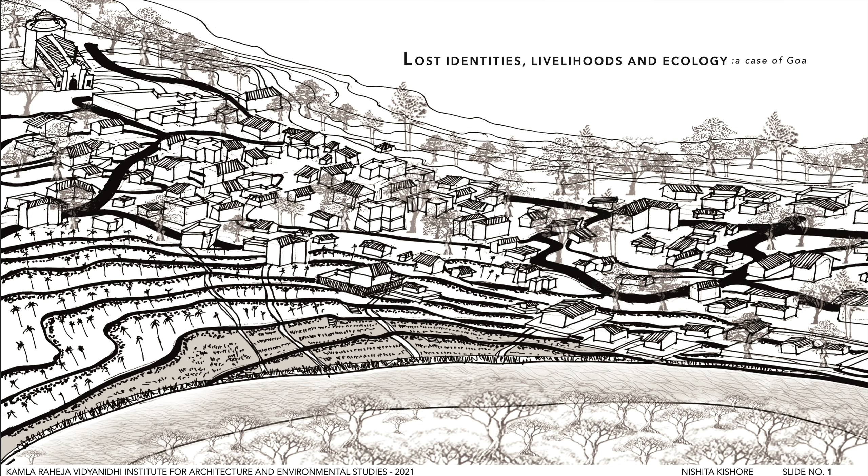Good morning. I am Nishita Kishore, and the topic of my thesis is Lost Identities, Livelihoods, and Ecology, a case of Goa. The thesis deals with the idea of alteration of landscapes happening from the beginning of civilization through various practices which results in the transformation of landscape to settlements, eroding the natural built fabric, heritage, ecology, and therefore causing the disconnect between the settlements and the landscape.

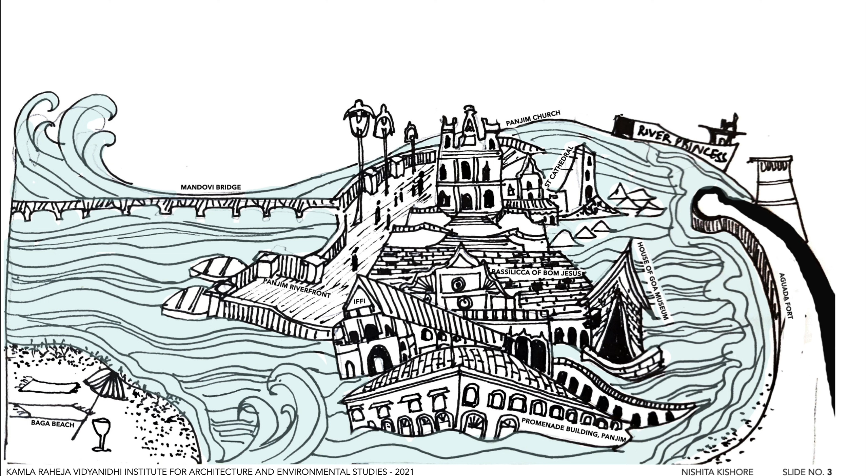This thesis also intends to focus on the communities in Goa who are resisting destructive real estate projects and how do the Goans perceive this and what are their imaginations for an alternative future.

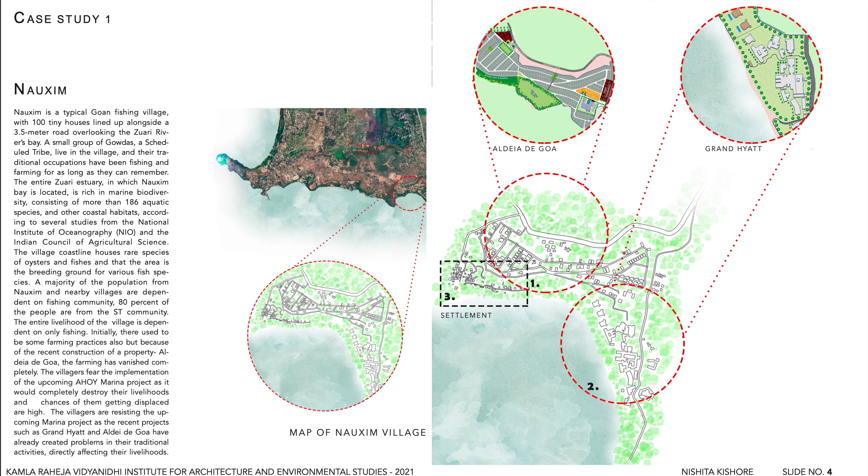Nauxim is a typical Goan village with 100 tiny houses and a small tribe of Gowdas. The entire Zuari estuary in which Nauxim Bay is located, the entire livelihood of the village is dependent on only fishing and fishing related activities.

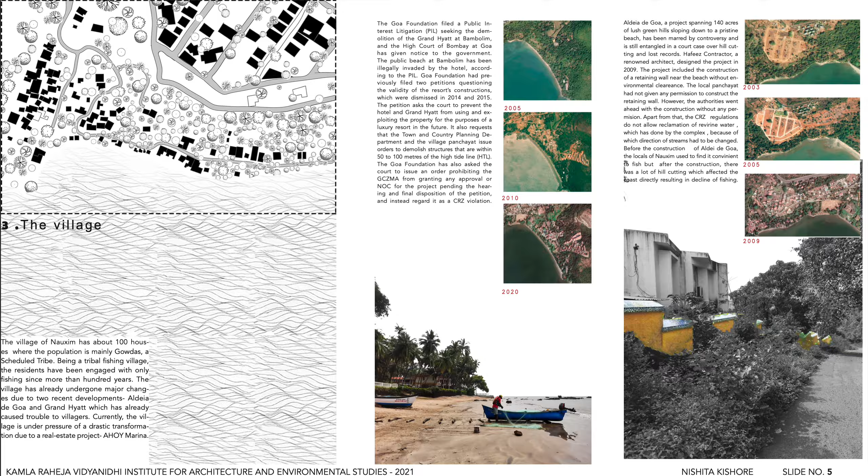The buildings are illegally constructed, hindering the fish catch of the village. Currently, the village of Nauxim is under immense pressure of transformation due to real estate projects. These are the livelihood activities happening in the village which are connected to the landscape.

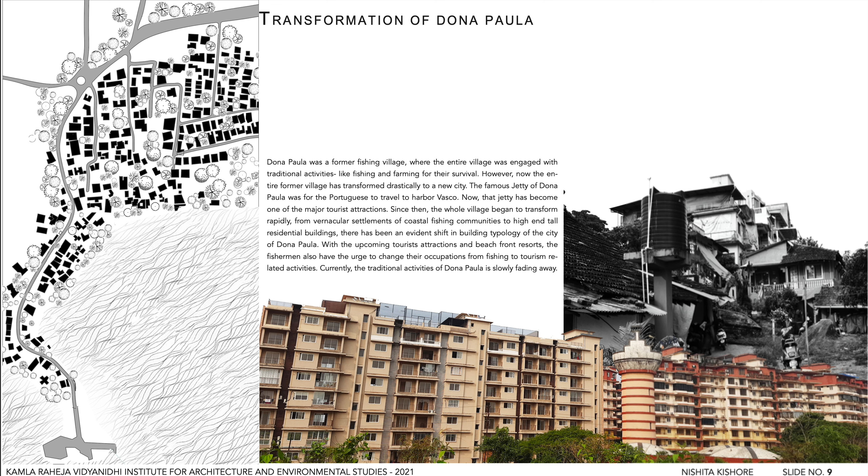Similarly, Dona Paula is also undergoing major transformation which is shift in building typology, eroding the vernacular and traditional livelihood patterns of the place. Now coming to the site, Siridao is a small village in Goa situated in Tiswadi Taluka.

It is a coastal village in which earlier the entire village was engaged with only fishing, but now only about 35% of the village is engaged with traditional fishing activity.

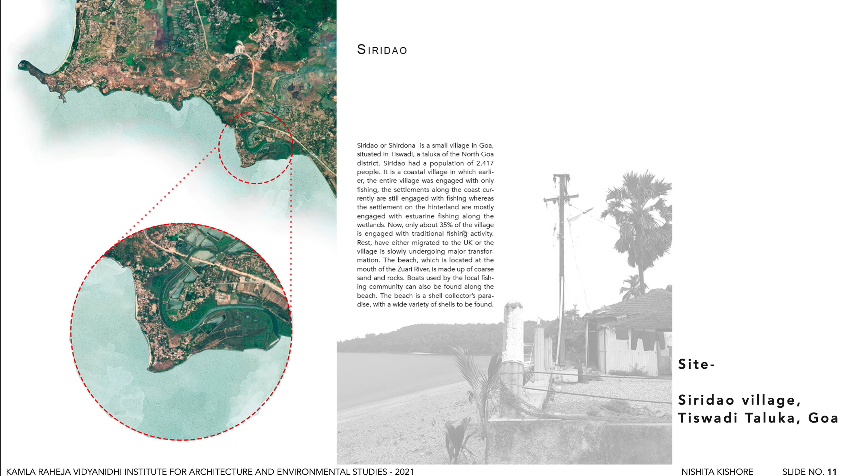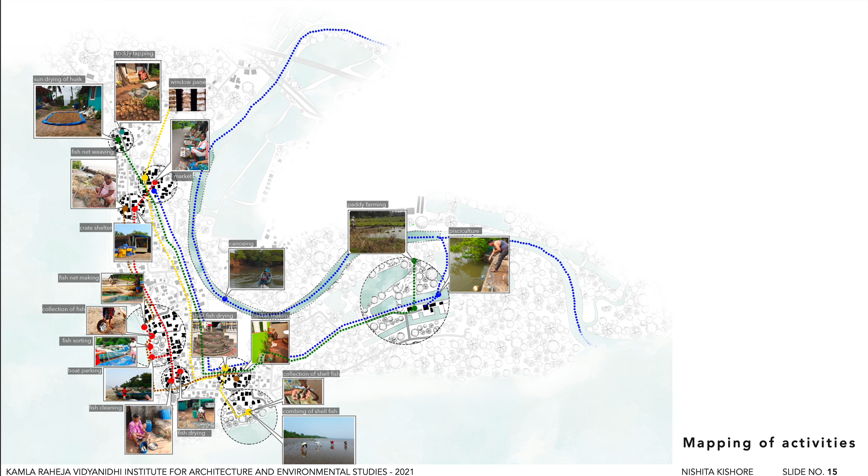The settlements along the coast are still engaged with fishing area, whereas the settlements on the hinterland are mostly engaged with estuarine fishing along the wetlands. The village is slowly undergoing major transformation.

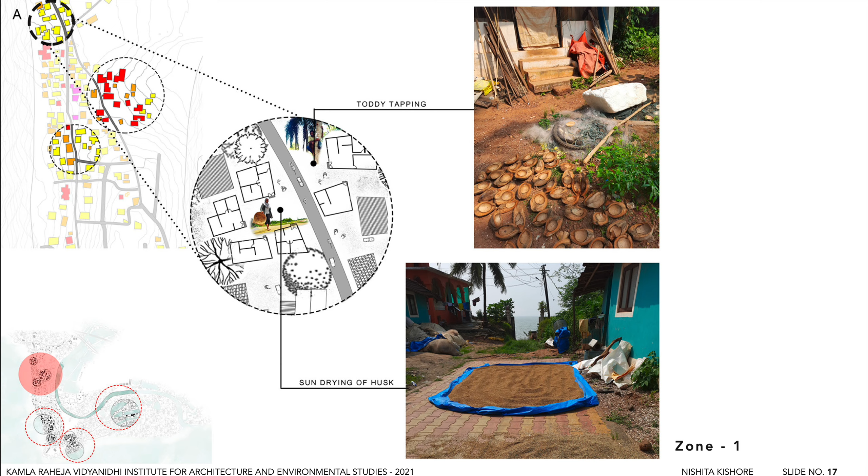These are the four zones in the village according to the landscapes. Now, these are the activities taking place in the settlement, showing how the spaces in the village are being used for traditional activities and how it affects the current typology of settlement.

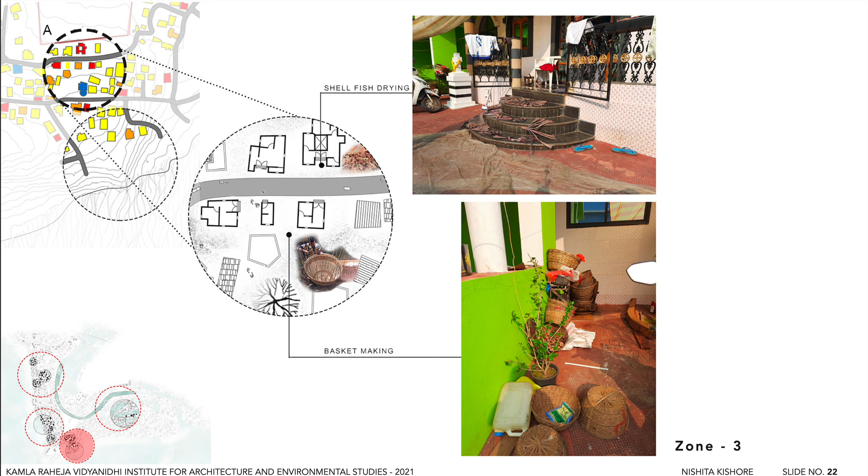There is a shift in building typology of the village. The spatial and socio-economic structure is also changed because of the transition in peri-urban vicinities due to migrated populace coming in with lack of proper planning policy.

With new infrastructure projects coming up illegally along the coast, there is an evident loss of livelihoods, identities, and landscape of the village, followed by change in architecture.

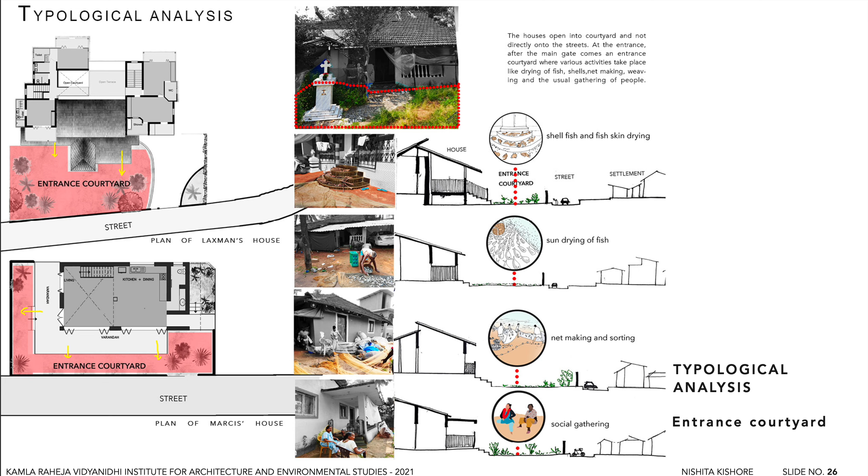To understand the typology of buildings in the village, these houses were documented to see the relationship between the livelihood activities and architectural typology of the buildings.

A study of village morphology is done to know how the buildings cluster together, the kind of community spaces created, and the nature of public realm in the village.

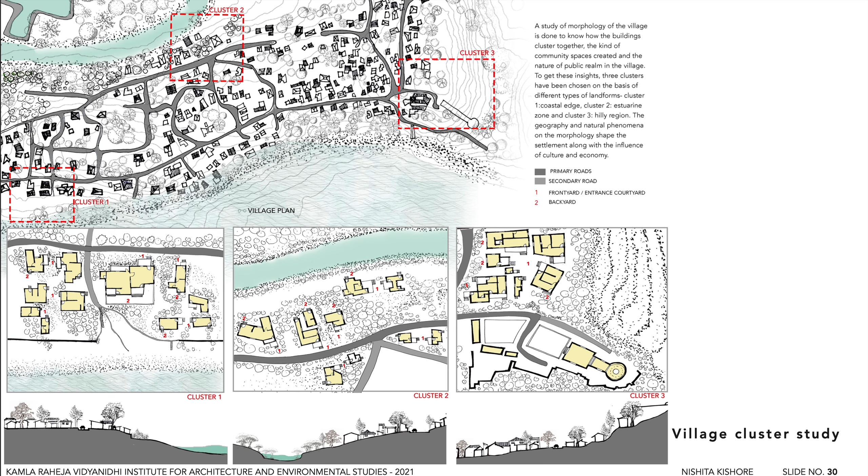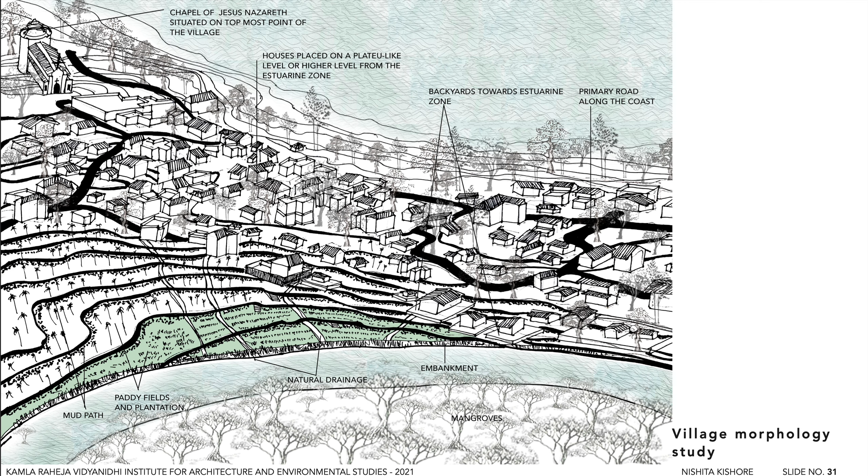To get this insight, three clusters were chosen on the basis of different types of landforms. This is a drawing to show how geography and natural phenomena shaped the morphology of the settlement, along with the influence of culture and economy. This identity map summarizes the relationship of landscapes, identity, and ecology within the village.

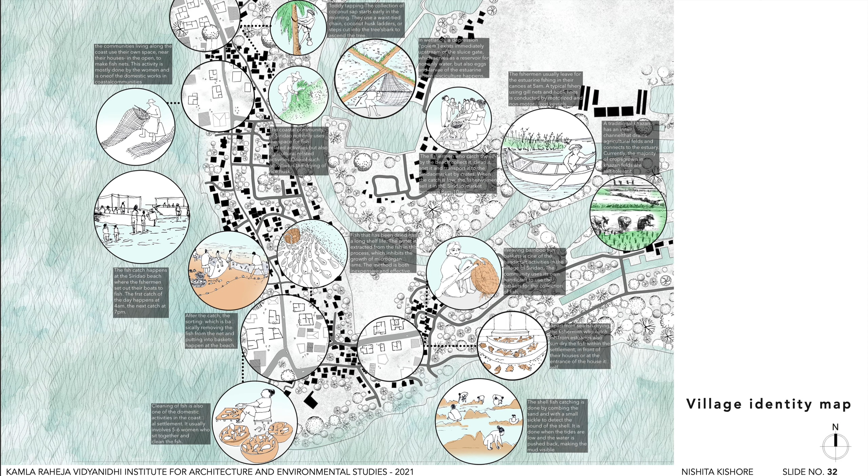Restoration of cultural landscape can be done by engagement of people in ecology through personal experiences, recreational spaces and amenities of buildings, and an ecologically and socially sustainable hub.

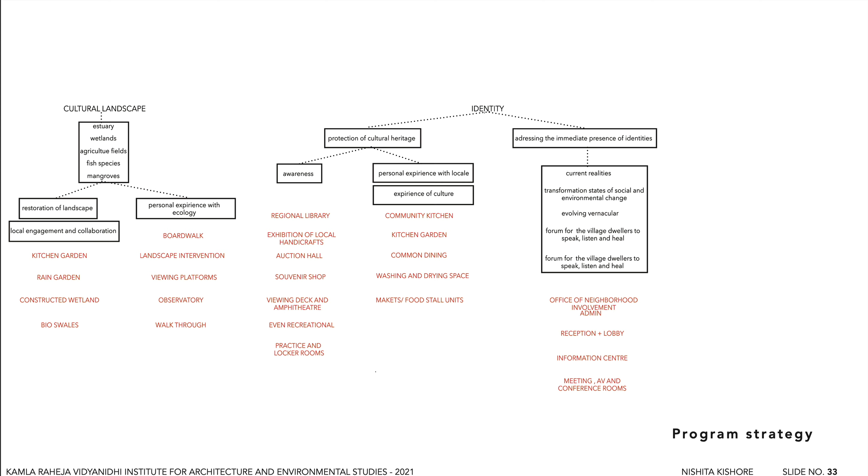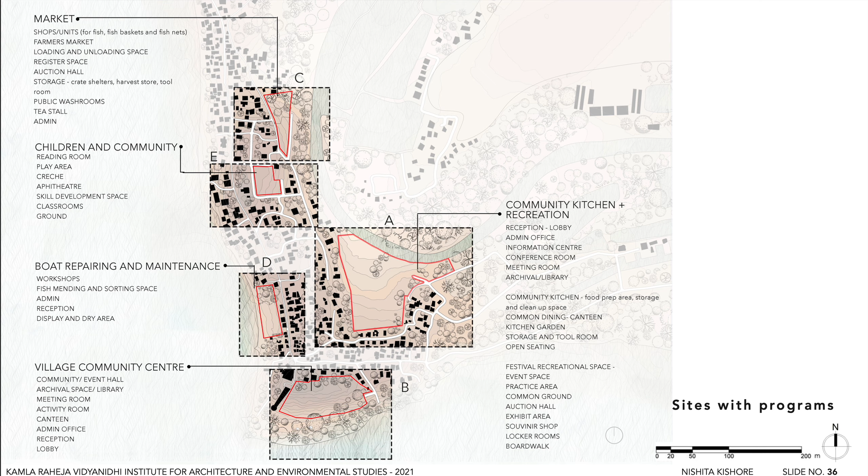Accordingly, a village site master plan is made with landscape and built interventions along with a trail to connect these programs.

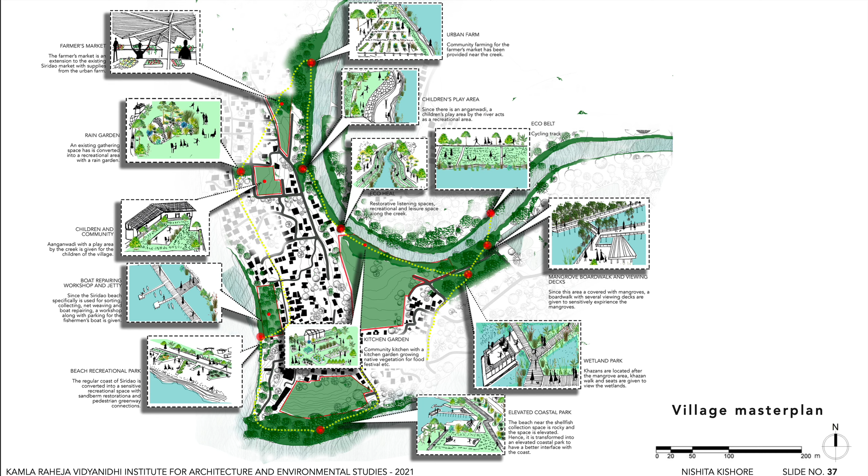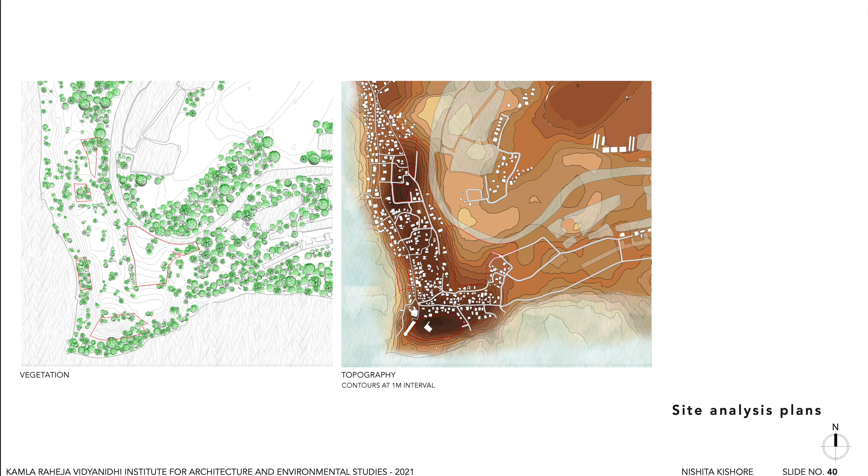These are the site analysis maps: figure ground, roads, land use, ecology, vegetation, topography, sun path, and wind direction. This is the first site section, site A, showing the relationship between the estuary and the settlements.

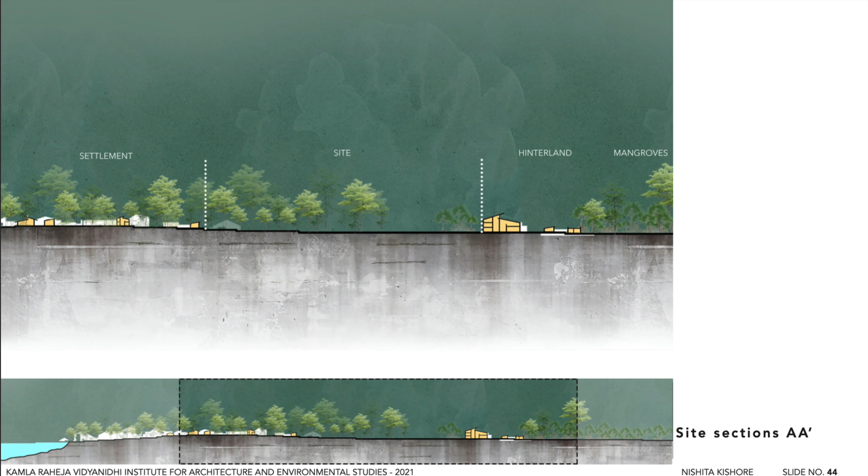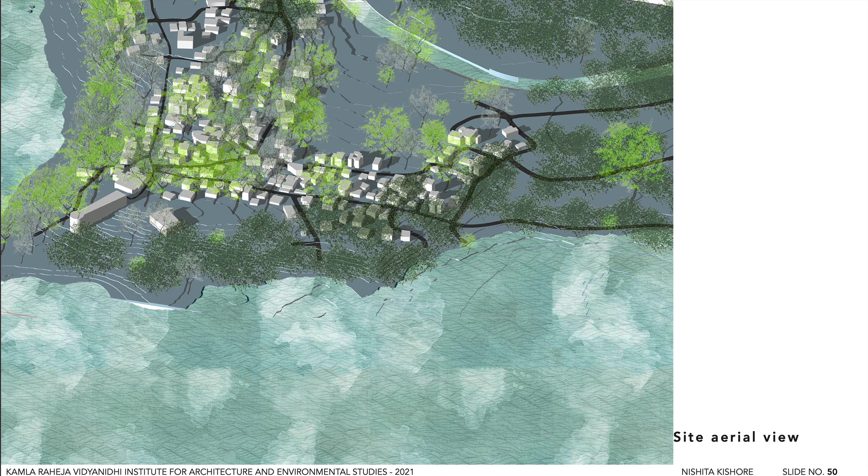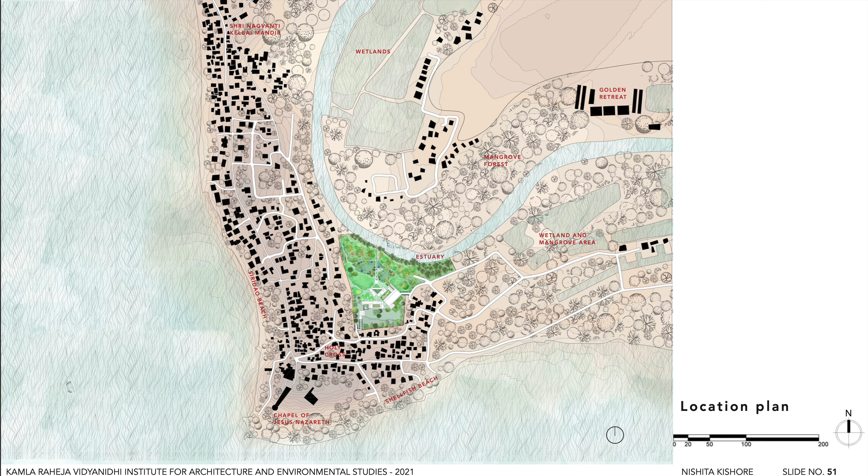The overall view of the site shows how the site sits between the estuary and the sea. The site is surrounded by estuary on one side and sea on the other. The entire village has these sensitive ecosystems such as khazans, mangroves, sand dunes, beaches, and hills.

The administrative program would be near the entrance, followed by the public recreational and exhibit areas, and finally going towards the estuary with eco healing programs.

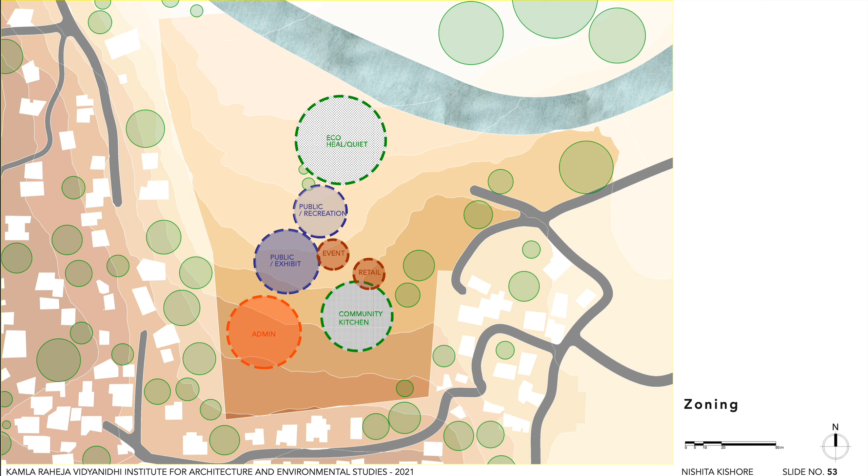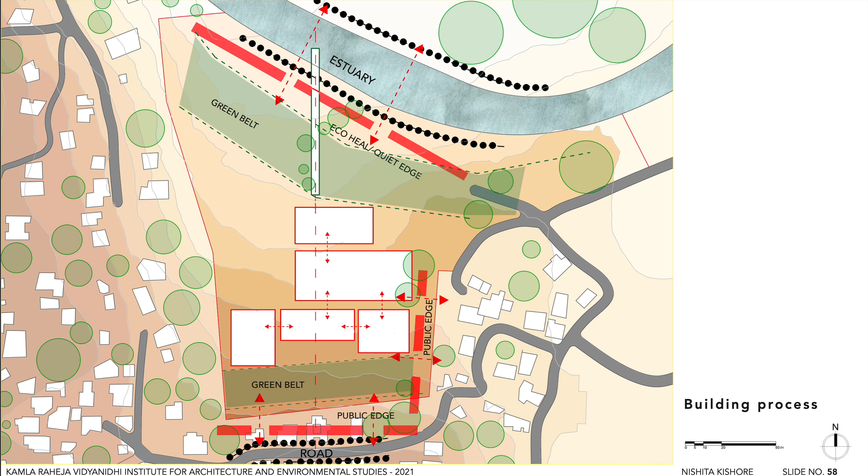The idea is to create a relationship between the public edge and estuarine zone by cascading the building towards the estuary while forming courtyards or pockets of different scales for different kinds of spill-out spaces.

This is how the modification of contours is done according to the building. The landscape of the site is done such that the indigenous trees come next to existing mangroves along the estuary.

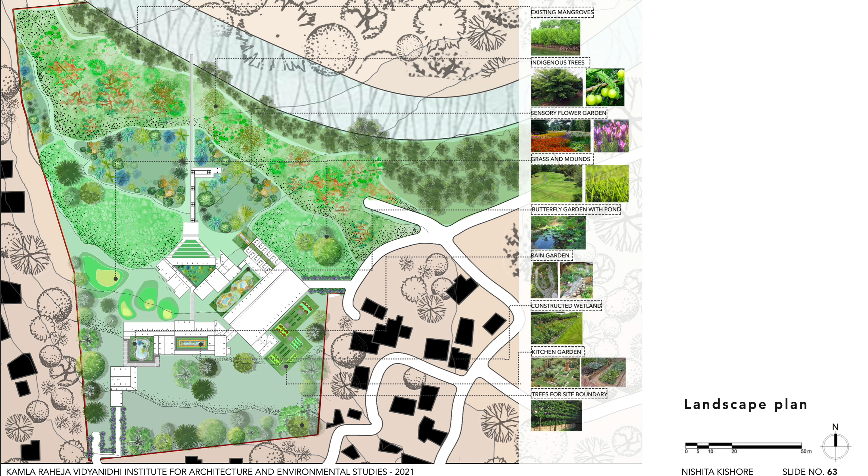Sensory flower gardens are placed near the boardwalk, and filtration landscapes like rain gardens, constructed wetlands, and butterfly gardens are in courtyards, along with a kitchen garden next to the community kitchen.

The total built up area adheres to the permissible area. The plan cut at 5.5 meters above sea level shows the admin block, community kitchen, and event recreational space.

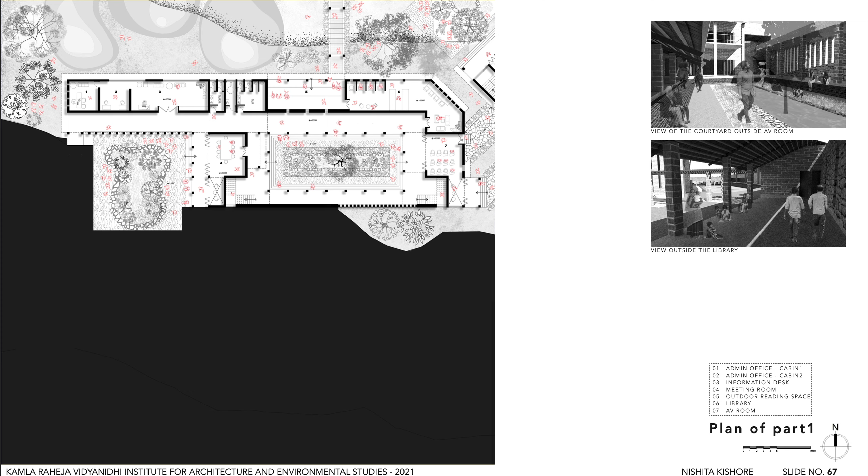There are three parts. The administrative block has been designed keeping the social aspects into consideration, since environment has always been thought of as being alive and interdependent with human interactions.

Local communities depend on small scale landscape activities for their livelihoods, socializing and gathering, leading to fundamental social transformations. As communities thrive on traditional and self-sustaining activities, a community kitchen with a kitchen garden promotes their local food business through festivals while also regaining social, economic, and environmental well-being.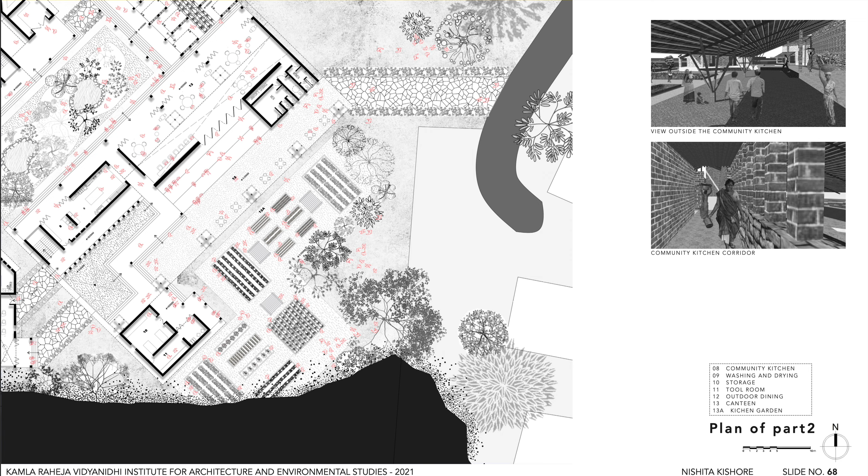As the life of villagers is deeply embedded in their daily activities related to landscape, the food stall units are placed next to the community kitchen where not only villagers but visitors would also get to experience this participatory process. The public recreational spaces are for the community as well as visitors to celebrate local festivals, see local handicrafts, and retain the identity of the village.

The plan at 8.5 meters above sea level shows the ground floor or reception and lobby, while the upper floors are for the rest of the programs.

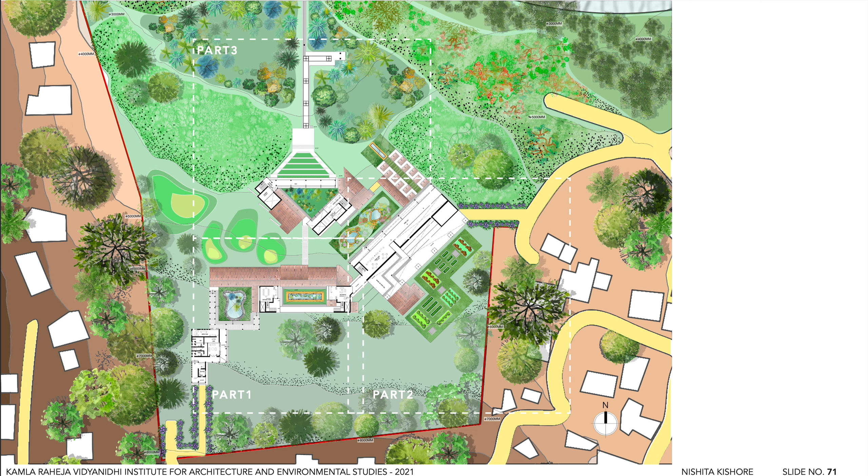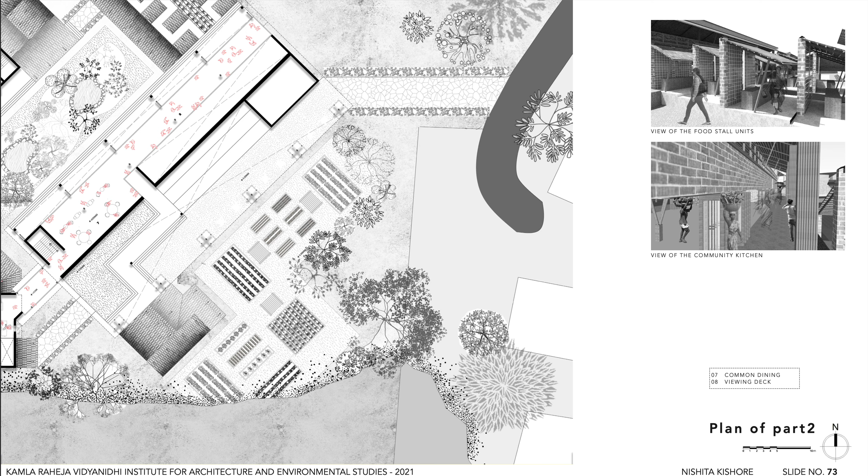There are three parts to this plan. Part 1 shows the reception and lobby area along with upper floors of conference and multipurpose rooms. Both these rooms have double heighted spaces with balconies spilling out and looking towards the rain garden. The upper floor of the community kitchen has a common dining space along with a viewing deck looking into the double heighted space.

The upper floor of the public recreational area has a bookstore and an exhibit extending onto the viewing deck which looks onto the outdoor seating and public courtyard on the opposite side.

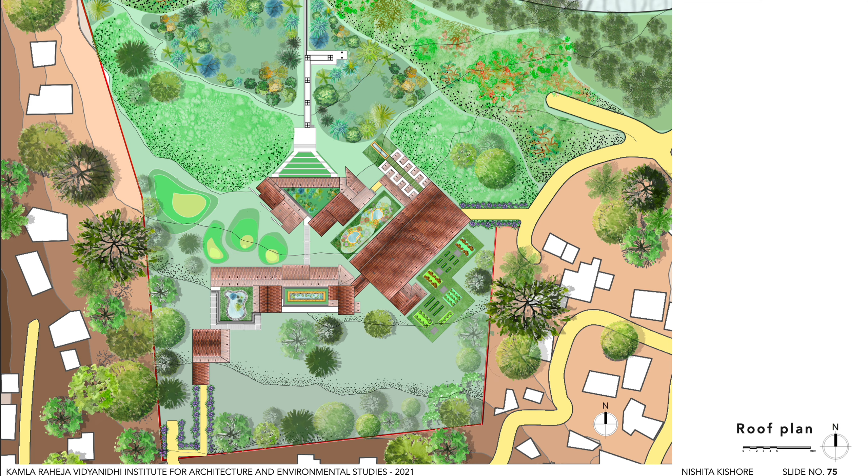The roof plan shows how the sloping of roofs is done at different levels. Section AA is cut through the administrative block, and the community kitchen comes in elevation.

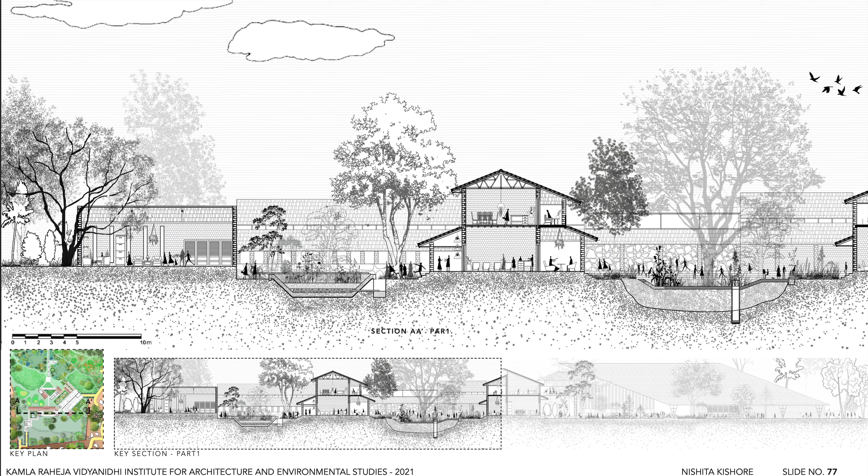Keeping the nature of built typology of context in mind, important spatial factors like entrance courtyards and balconies are designed for these rooms. Community kitchen, a space which can be shared by all and managed by dwellers, is connected to the admin block through the upper floor which goes directly to the viewing deck.

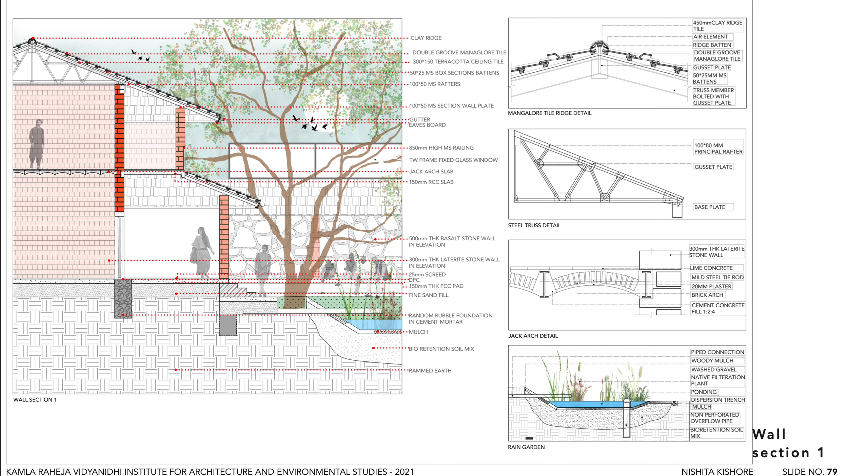The materials used for walls are locally available laterite stone blocks. Roofs are made up of Mangalore tiles with steel trusses, and jack arches have been used for the slab.

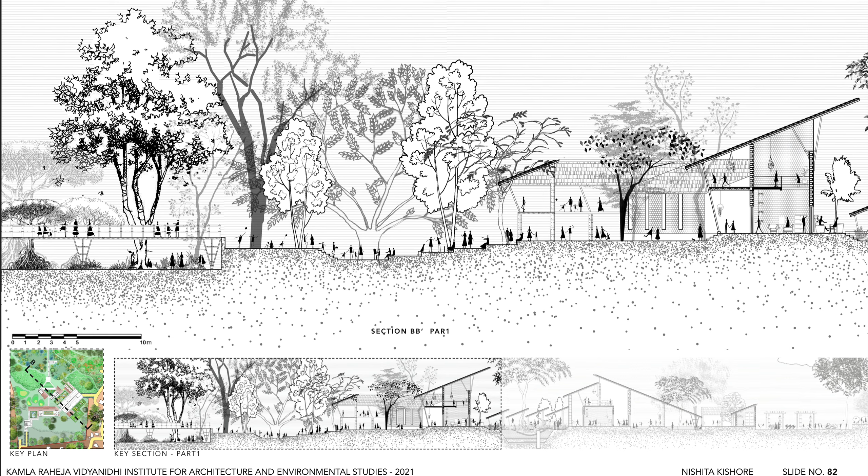The spatial typology of the building and design strategies employed here create fertile ground for interaction, stimulating links between people and landscape. The community kitchen and the food stalls have shared spaces with an extension to the kitchen garden.

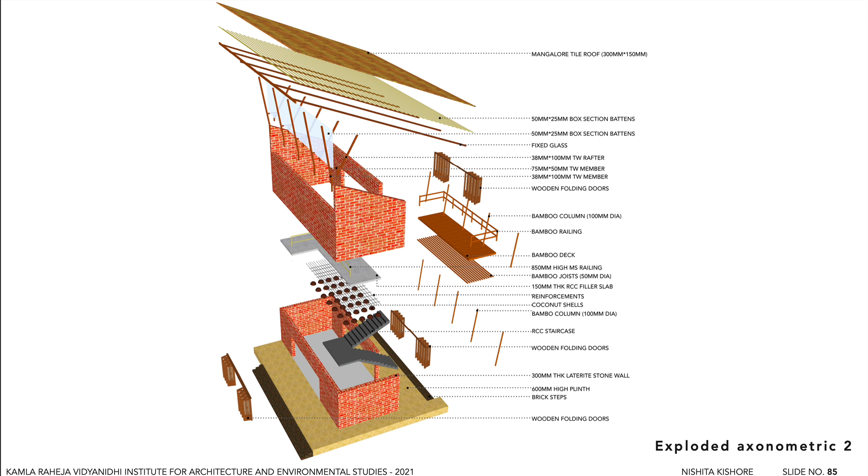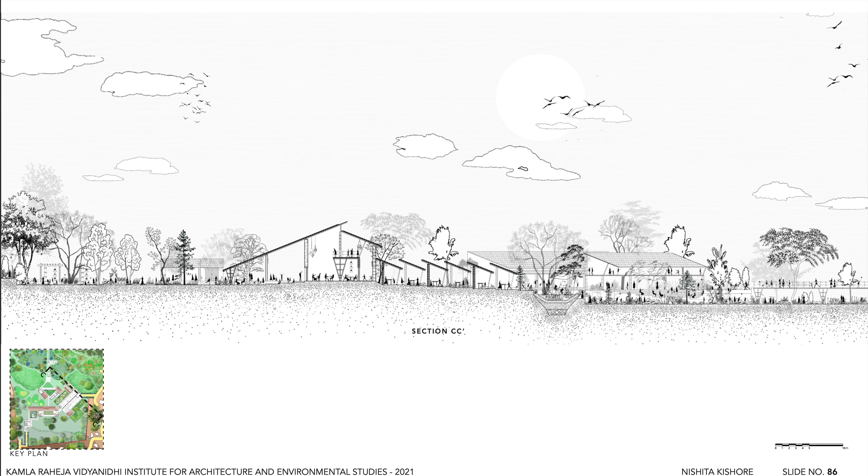Section CC is cut through the other side of the community kitchen, food stall units, and the boardwalk in elevation. Domestic life highlights the characteristics of life in a more direct way compared to political and ritual contexts. These are social practices in small groups of people interacting in person within constraints of the landscape.

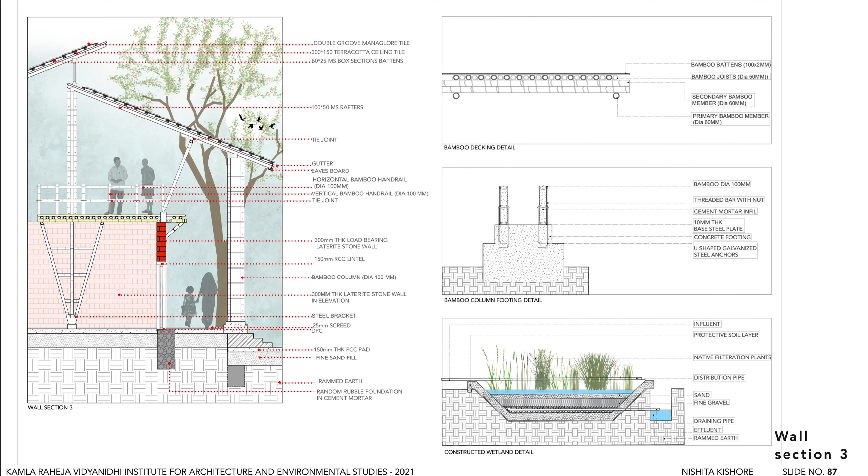Bamboo decking along with bamboo columns are used for the viewing deck of the community kitchen. This is the axonometric showing the placement of elements in the community kitchen building.

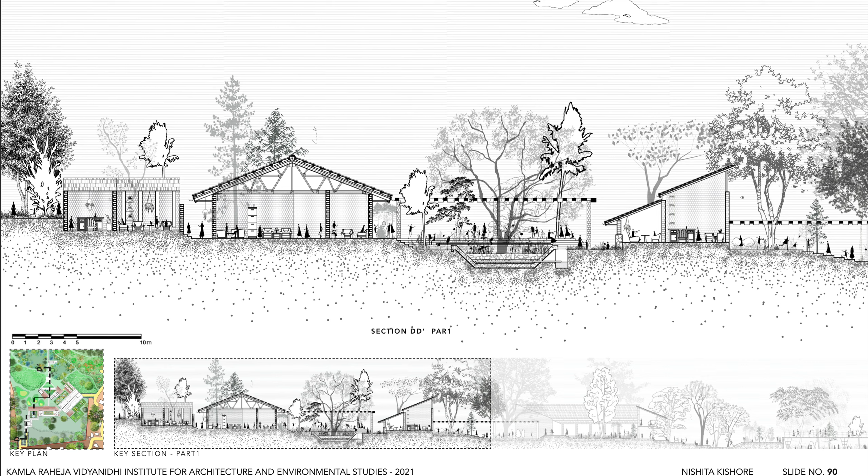Section DD is cut through the administrative block and public recreational space. The waiting area and admin cabins are connected with a filtration landscape. The public recreational space has a viewing deck looking onto the outdoor seating and event space which further extends to the boardwalk.

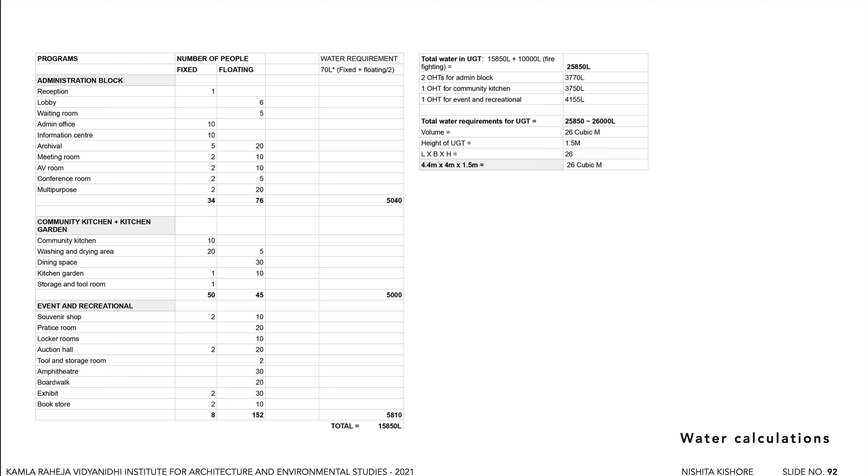This is the water requirement calculation for the building, the water supply diagram, sewage and grey water recycling. Water from toilets passes through inspection chambers to the septic tank. The filtration landscapes filter the grey water leading to the flushing tank. This recycled water is used for irrigation of the kitchen garden.

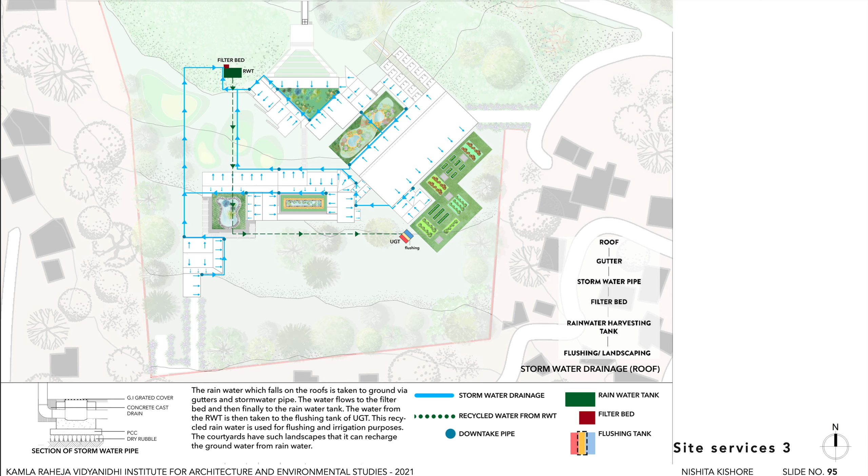Water from sloping roofs goes to the rainwater harvesting tank through filter beds and is used for flushing. The rainwater which falls on the plinths and stairs flows into the courtyards, having filtration landscapes from which it goes to the rainwater harvesting tank, which can be further used for irrigation or flushing. The fire system shows placement of fire hydrant and hose reel near each building, placed 30 meters apart.

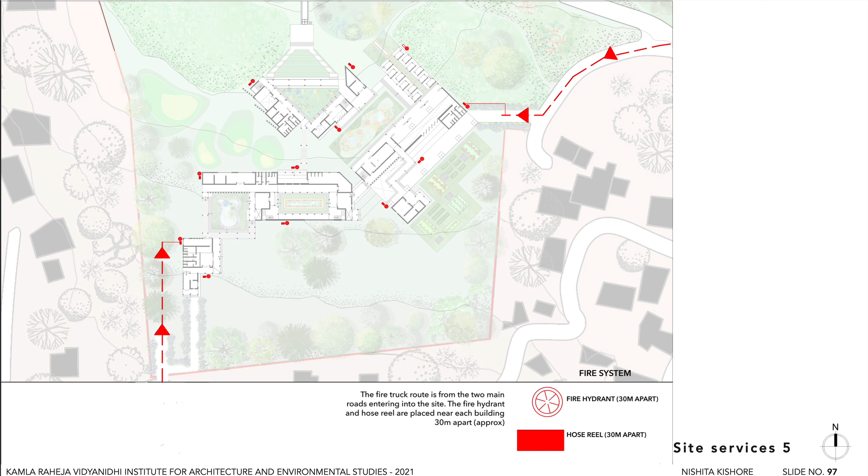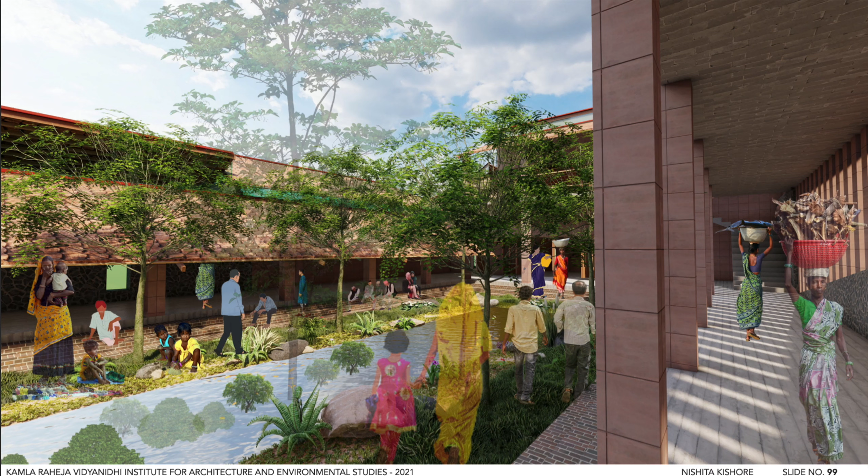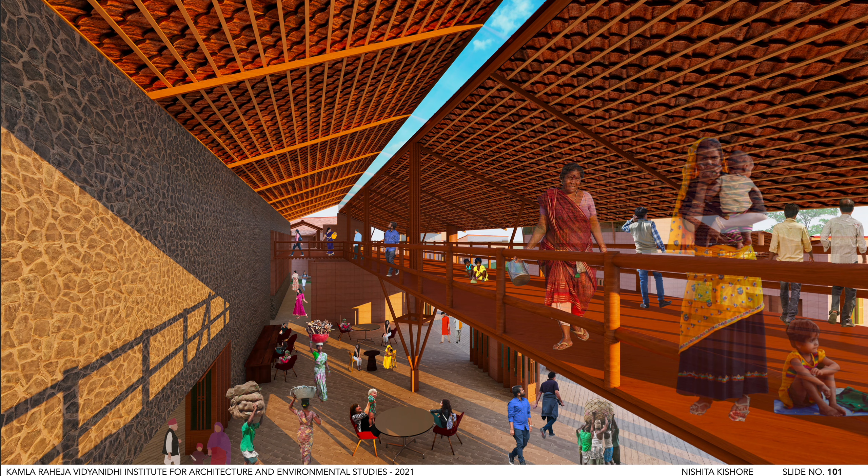This is the internal view of common dining inside the community kitchen building, having a double heighted space with the bamboo viewing deck and basalt stone wall.

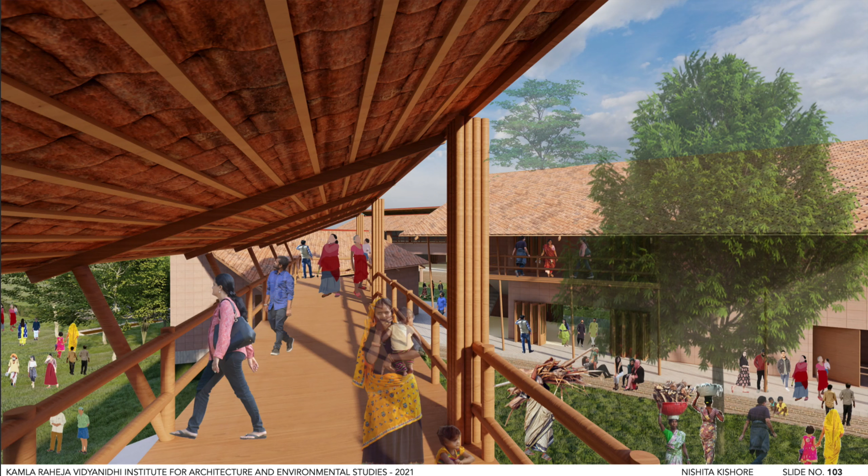Currently, at a global level, there has been degradation and creation of less valued landscapes. The conservation of landscape does not mean only to protect the fabric or create landscapes of aesthetic value, but also to retain the intangible and tangible aspects of communities.

Any development in these zones should happen considering the initiatives taken by the community itself, which help them retain their livelihoods, identity, as well as economy. This thesis is a model of how one can intervene sensitively and create interventions which are responsive to the community landscape. Thank you.